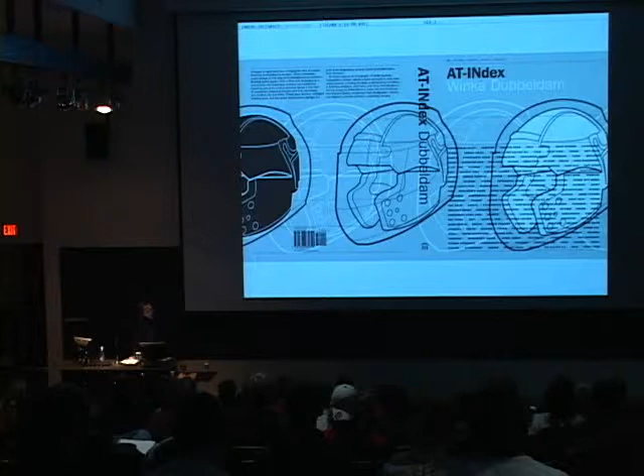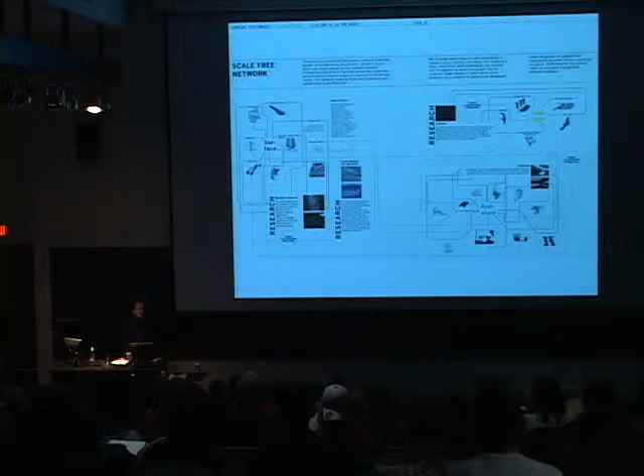So yeah, here we are. The first thing I want to show is what we think about in the office, just to counter that argument. This is a book which came out with Princeton Press in 2006, and the idea is that we as an office believe in networks, not only in the way we work with other people, but also in the way we work in the office. The idea is to have a network of experts in the office, that everyone has their own input, but also that we like to work with other people like MIT Media Lab, or some scientist friends in Holland, since I am originally from Holland. That's the way we like to try and advance the way we think about buildings, and I'd like to talk a little bit about that today.

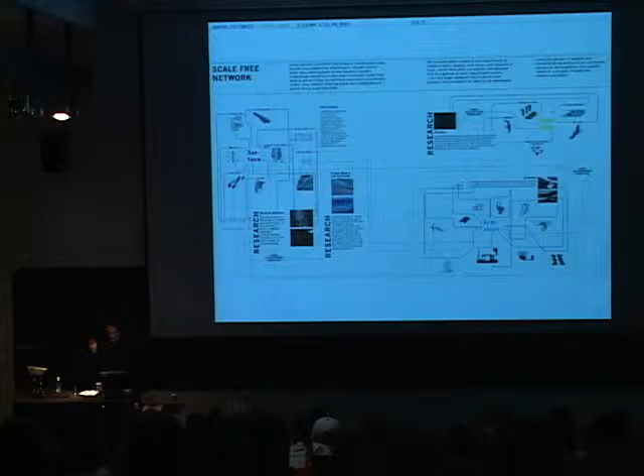The other thing is our research - and this is interesting, the editor of Princeton Press noted to me at some point - that your work goes through fields of research. And as we talked about that, it is actually very true. I think, if you guys ever start an office yourself, you'll hopefully find that as well, that you have focuses which stretch over a longer time than just one project.

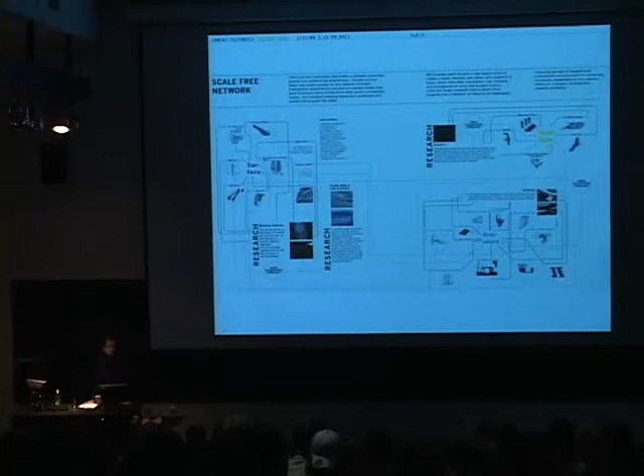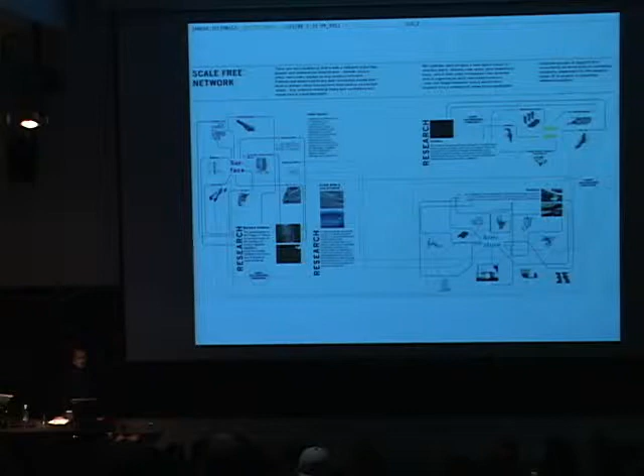So let's say over a few years, our first few years was actually thinking about the theme which was just mentioned, confluence. The first few years we were really interested in how architecture is inflected by urban systems and vice versa, which we called interface. We did a lot of urban studies, but also a lot of buildings which were inflected or influenced by cities and city systems. I think the interesting thing about a city is that it is a set of systems.

And then the next thing we looked at was intelligent surfaces, or what we called smart skins - the idea that a surface is no longer 2-dimensional, but maybe 2.5 or 3-dimensional, that you can occupy it, that it can have intelligence, embedded technologies, and all kinds of performances. And then the last thing, which sounds a bit more abstract, is armature - the kind of 4-dimensional version of a smart skin, so maybe a smart object.

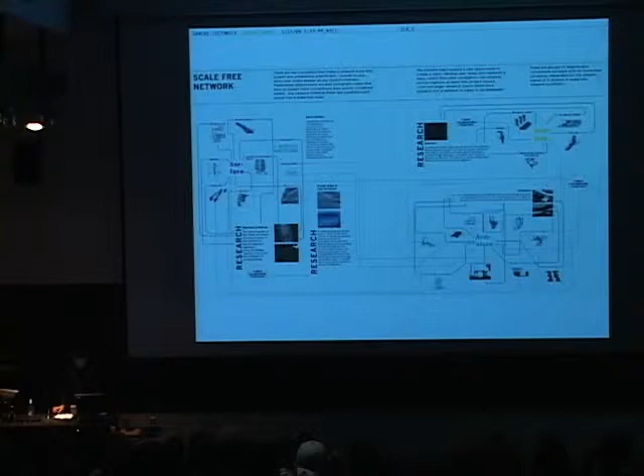Okay. I have one big influence, I think - it's always interesting to think about those things - or maybe two. One is Gilles Deleuze, who has written a lot, and you could say he's a projective philosopher. The idea of philosophy is usually you go back in history, discuss ideas which were before, and then discuss the old ideas again in a new way. He was one of the first philosophers who counteracted that with another idea - that you can actually pose an idea in the future and then philosophize towards it. One of the things he wrote was this statement, which I really like.

The first real challenge lies in the statement and creation of problems, the right problem, not just a problem. The second challenge lies in the discovery of genuine differences in kind, and the third in the apprehension of real time, as in immediate. He wrote this in 1988.

This notion of the right problem, as discussed by Gilles Deleuze, prioritizes concept development over problem solving, curiosity over absolute knowledge, and immediacy over stasis.

This investigative approach has been redlined through the research and design conducted over the last few years at Archi-Tectonics. The work can be described as an open network, a network of projects linked through three fields of research: armature, surface, and interface. These fields are not isolated, but rather create a synthesis of interests that overlap and inform each other, affording a rethinking, reinvestigating, and regenerating of architectural concepts.

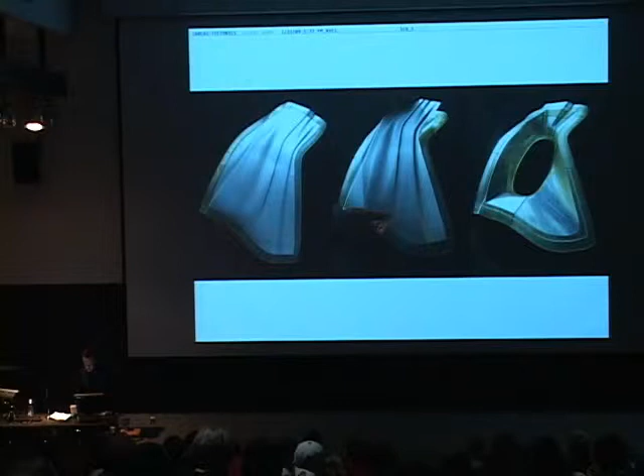This was a light we designed for a lighting design company, obviously. I'm not going to talk too much about it, it's about surface. This is one of the first buildings we built.

That's also why I decided the idea of the book was to actually do only a book after we built some buildings, so we waited a while. But this building was interesting in the sense that what you see here was an existing warehouse of 6 stories, and rather than tearing the warehouse down, we decided to keep it and fold a 12-story building around it.

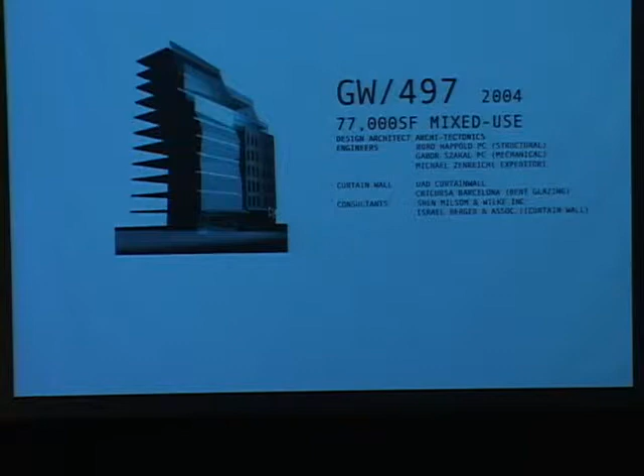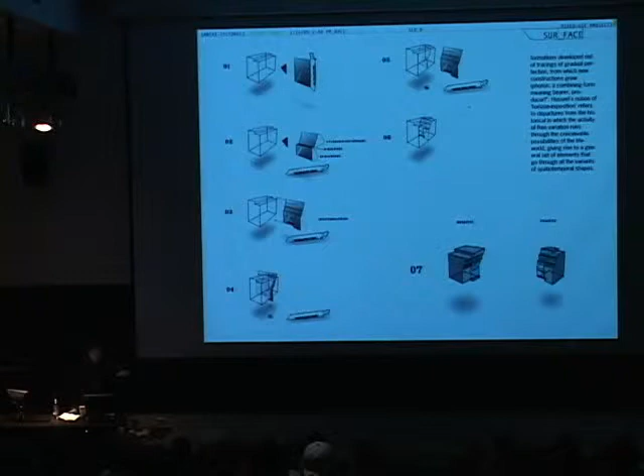And to think of the building code as an idea of recoding - not so much a building code as a restriction or something you have to fight, which is going to make everything impossible, but to think of it as something really interesting. If you read it really well, you potentially could get things back out of it. So consider it a game.

But the first thing we discovered from the building code is that these setback codes in New York are actually not based on a setback code as in steps or the wedding cake scenario, but as you see in this little tiny diagram, it was an inclined plane.

In the end, what we did was use mathematics, the idea of inflection, and inflect this inclined plane on the straight plane and vice versa, which gave us a rippled facade that would go equally from the top to the bottom.

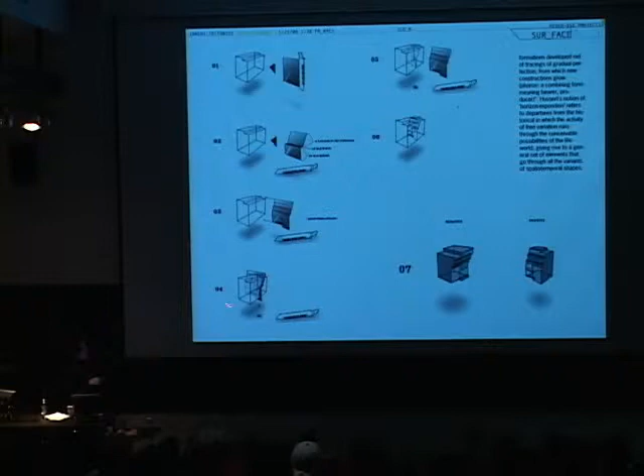It would intersect with the extruded volume of the existing building. So you see this little cutting device here, and then you end up with a building. That's where we are then.

And then the other idea was to create these folds, as you see here, really as folds. So after a long investigating moment, we had the glass folded in Barcelona, the mullions extruded in Hong Kong, and the whole thing was put together in Brooklyn. And then, of course, you have these very brave people who hang out of windows and put these huge things in place.

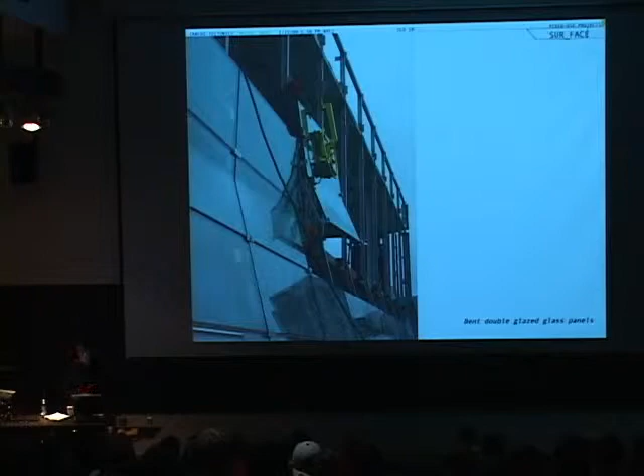The way we did that, and it's maybe interesting since you all work in 3D software, is that we designed everything in 3D. There's no measurements on these drawings in the sense of this is this long and this high, but it's all work points - basically X, Y, Z coordinates in space. Those 3D drawings were sent to Barcelona and Hong Kong.

And those people actually made a 2D drawing from it. So it's quite an interesting way of working. And also what's maybe interesting is you cut out the contractor - nothing to do with the contractor, it goes straight to the manufacturer.

And then the bottom of the building - I should probably go back one. The idea was also that this facade is this famous 3 dimensions. So what it does, every time it hits a boundary, like here on the street, it folds out and comes back as a big glass wing.

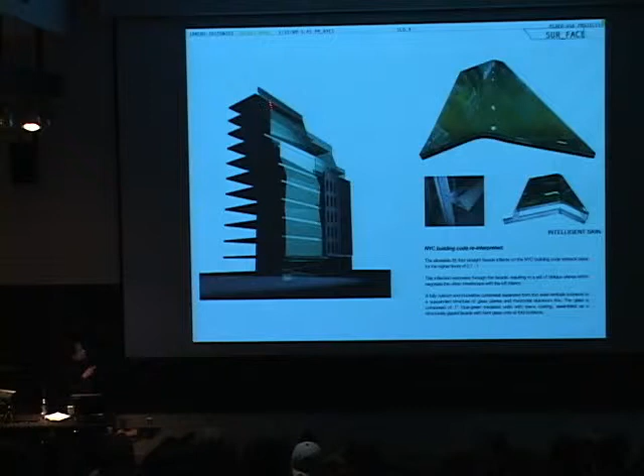Where it meets the building, there's balconies inserted and the glass folds in. And on the top, it folds up and over as it sort of dissolves in the sky, you could say, as a glass building.

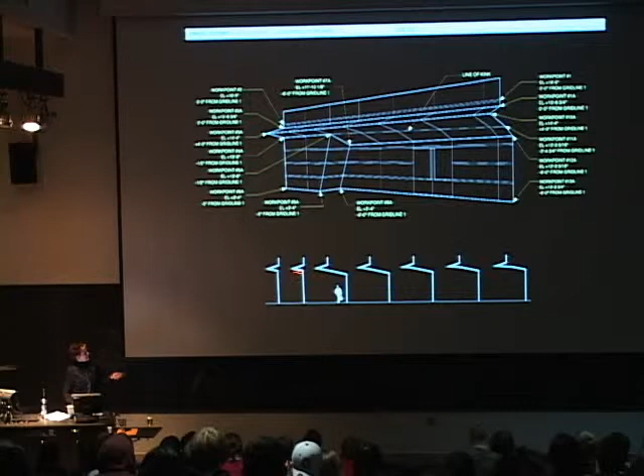Then the sections of the entry wing constantly change. These are the extruded mullions, and as you can see, all these mullions have different angles—only five, thank God. And that's the wing as it started to occur.

The other thing we did is completely separate the vertical and horizontal mullions. The verticals we did in steel, which helps because you can weld it, and that was attached to the building. So the glass is actually floating off of these steel mullions, hanging down from the 8th floor to the ground floor. On this level, there's really just roller connections, so it's kind of flopping around.

This is a gallery in the building, and the rest is residential—Surface Magazine was actually in there. These are all the residences. We made the facade openable. The building is built mostly with passive solar energy and a lot of renewable materials. It's not completely off the grid, but it's very, very low use in energy.

Here you start to see the folds as they negotiate. What was quite interesting about the folds—I didn't know this until we actually built it—is that you can literally look down through the glass of your bent facade into the neighbor's living room, which is quite funny. It's kind of a voyeuristic building.

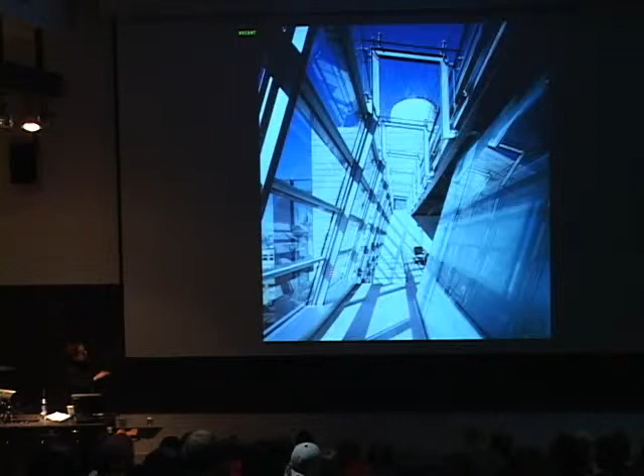And then this is the top, where the penthouse comes up, over, and down, forming a glass parapet. Here you can see that the steel really carries all the glass—there's no structure in the facade. All the actual structure of the building is held back, so the concrete is all cantilevering up to here. The steel is really just supporting the glass itself.

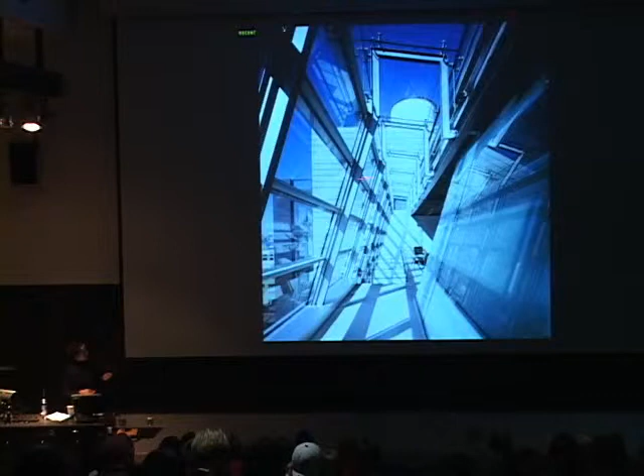This is then on the top. You can see that the glass is just connected with little pins, like the wing on the ground floor was as well.

This is then an interior. We mostly delivered this building as raw space, which wasn't that raw—it had finished surfaces, but in New York you can imagine. We did this loft, about 3,500 square feet, for one person, a 28-year-old guy. And then we did a loft on the 2nd floor, about 1,600 square feet, for a family with one child. In New York it's very hard to predict who's going to need what, so we finished the spaces as surfaces but didn't put in bedrooms.

This space we did for a person who was a painter and photographer. We made it basically very simple—just one spine connecting the east to the west facade, and behind that are private spaces. For example, this is the bedroom with a bathroom there.

The wood is quite interesting—it's bogwood, an oak that's been in the swamps, which gives it that beautiful blonde and black pattern. It's kind of a tree gone wrong, you could say.

This is another building we just finished. It's a completely different market, in Philadelphia. Philadelphia is much more alternative than New York—different market, different people. It was built in Northern Liberties, one of those industrial areas where artists start to live, galleries start, new restaurants start. It's really great, kind of an alternative area.

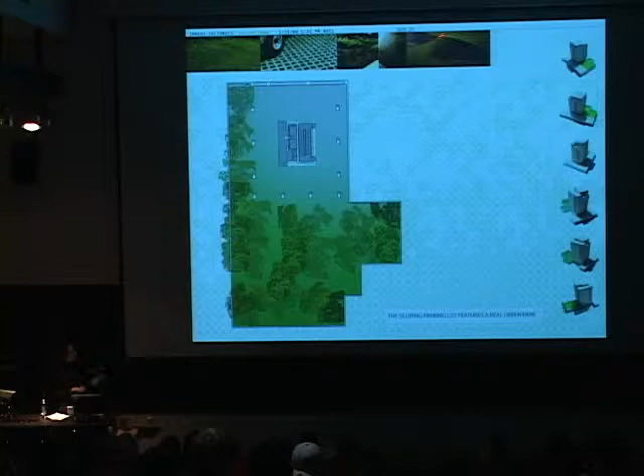We thought it was important that it became a park, so the surface where you're parking on is grasscrete, which can go from this pattern all the way to grass looking—you can vary from here to here in the pattern. And the way we did that is we actually only had the building standing on the ground on one side.

So this is the only level where it's kind of zero. Then it folds up to +1, and the parking lot goes from 0 to -1. So there's a slip between the two, which gives this very spacious area.

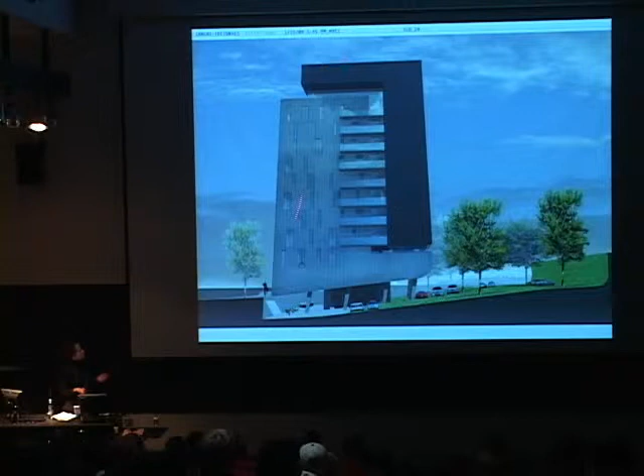The area it was built in is very small scale, so we decided to build the building from a set of interlocking Ls, so that it started to fit more into the surrounding area and the whole region.

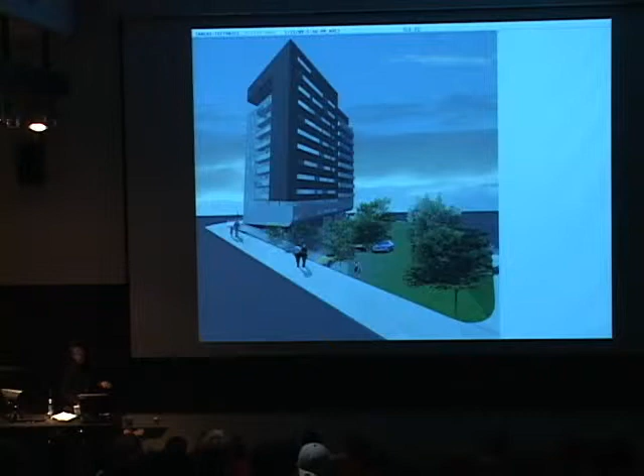It's on the corner, as you can see here. A lot of people were already calling this a skate ramp. This had a perfect curve. And the other curve is found where the building meets the parking, right there where you go under the building.

It's built in concrete, like in this school. I was just noticing today all the beautiful cantilevers you have. Well, that's nice, because when you pour concrete, you get these huge cantilevers.

This is up on top of the penthouse. You get interesting cuts of the city. This is actually the city center of Philadelphia as you look out over it. And then this is the front, where the building hits the ground.

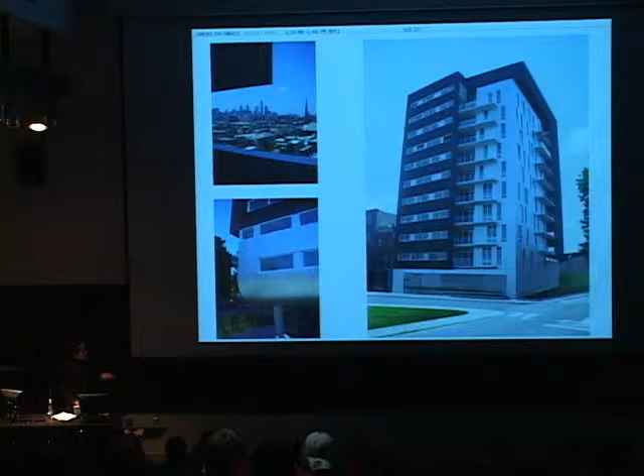This is the facade looking down. The whole building is built in alucobond — an insulated aluminum panel. That's why you can actually bend it, and it's very flexible, because it has two skins with extruded foam in between. We used the size of the panel to make exactly the line of the windows too, so it feels like a modular system.

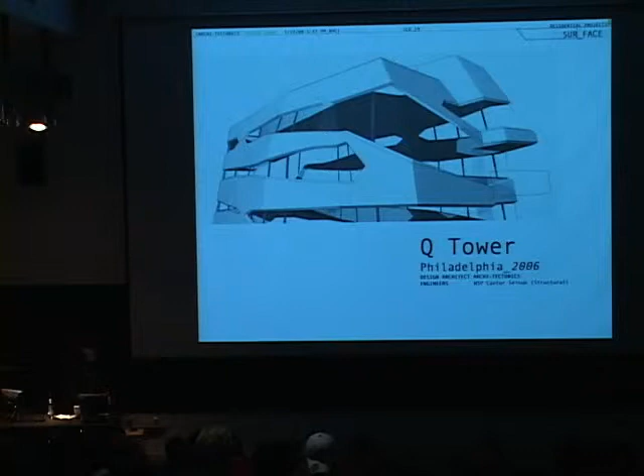Then, the same owner, next tower, is called the Q Tower. This is a tower where we worked together with MIT Media Lab. I was really interested in making a tower that would become more robotic — we talk a lot about interactive spaces, but I was interested in turning that interactivity into something more like what your computer starts to do.

It's basically like software — it starts to learn your behavior rather than the other way around. What we looked at with Ted Selker from the MIT Media Lab is how you take known technologies — smart passes for parking, sensors for lighting, sensors that sense the sun and put blinds down — and link all these technologies into a system that would ultimately get more advanced.

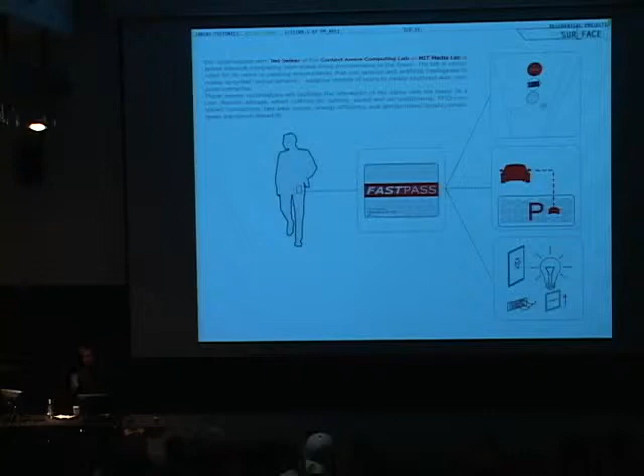So here we're running through some of those.

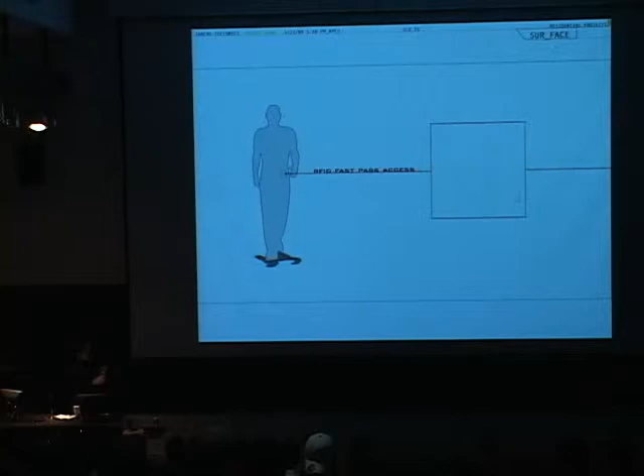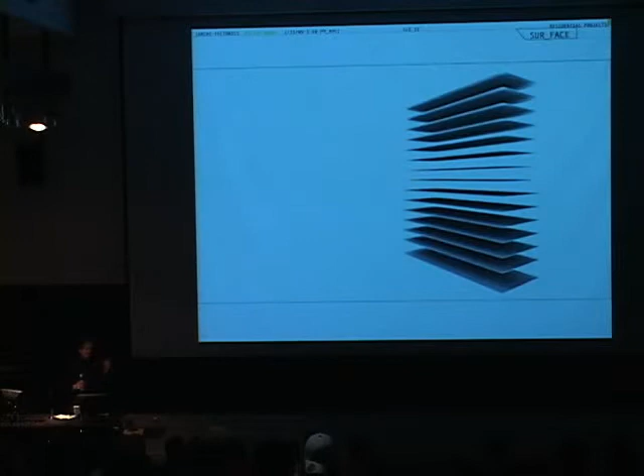For the tower, what we'd discovered in the meantime when we built the American loft was that while we were pouring the concrete, all those facade elements were being made at the same time. So when we finished pouring concrete for the building, three weeks later the facade was up. We thought that was quite an interesting idea.

The next thought was: if you build a tower, why couldn't everyone have a different house — like building villas in a tower? Is repetition really that important if you have parametric software that lets everyone have their own individual apartment?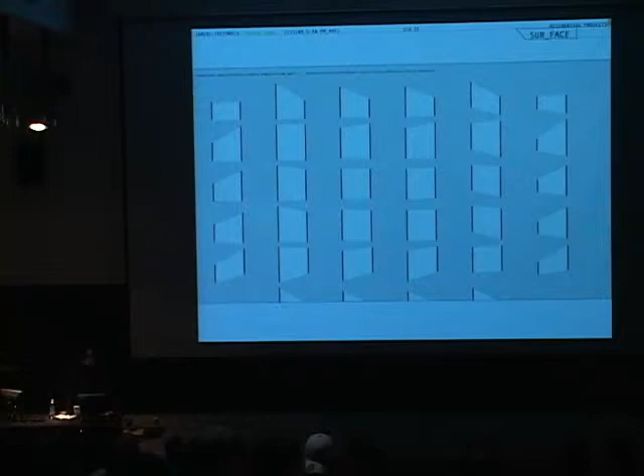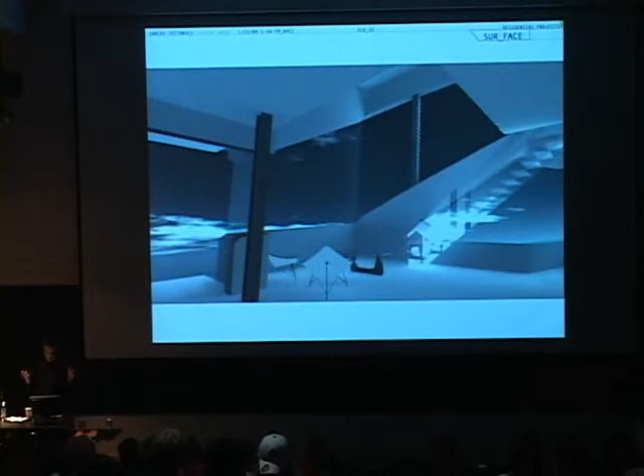So what we did was devise a simple set of algorithms — simple rule-based systems that defined a freedom where you could rate each opening in the building relative to its function, give it deviations and restrictions, and let them negotiate with each other. What happened is it became possible to create different windows for different spaces, but the main premise was that every space, including bathrooms and kitchens, would have windows.

The other thing — probably my Dutch background — is I always think it's weird that you only have penthouses on top. I personally don't like being on top; I like the second floor. So what if I ever got money? I'd have to live in a small apartment, because every tower is built with small apartments on the second floor that get bigger toward the top.

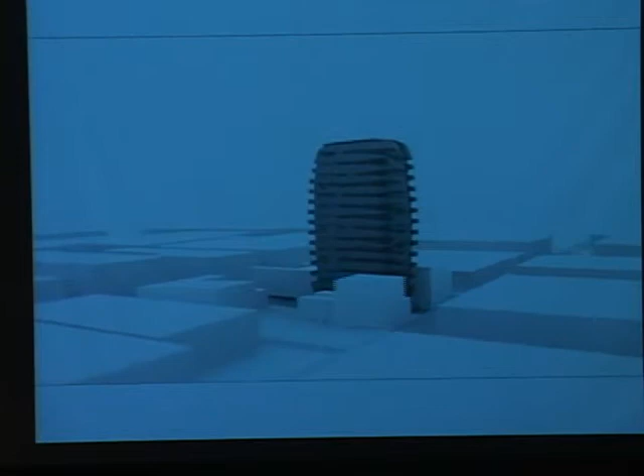So I convinced the owner to do 5 penthouses — 2 on top and 3 distributed through the building — so that if you wanted a nice big duplex on the 5th floor or the 8th floor, it would be possible.

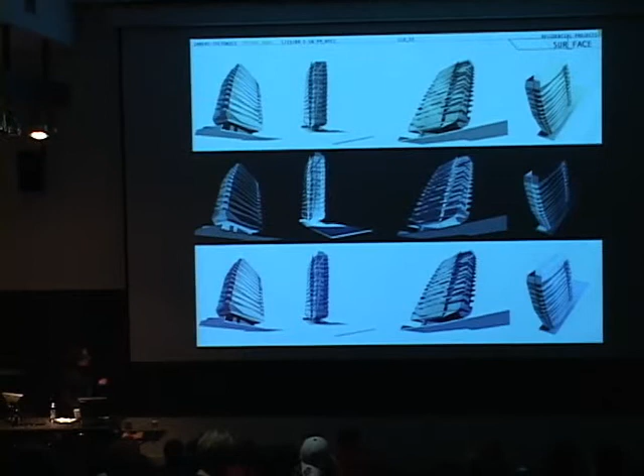So this kind of worked itself into this little tower. It's a very, very small site—literally the site of a plot in a normal urban environment. I think it's about 25 by 100 feet.

This is the parametric software we started to put it into, the limited version of CATIA. Frank Gehry's office developed the digital project—you probably use it here. And that allowed us to make the quite random design we made in the beginning.

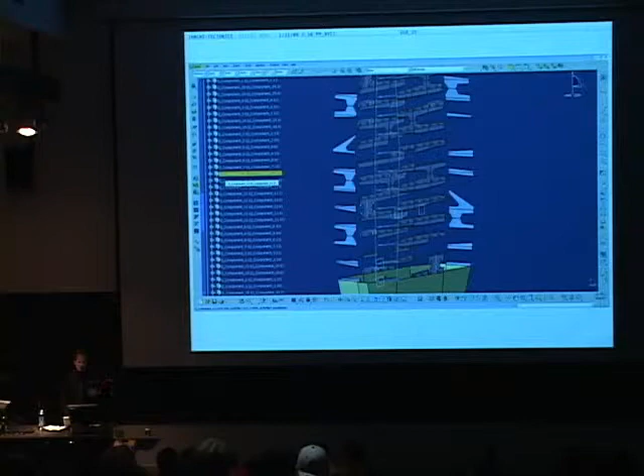We started to see similarities, and we found families of components which could then be repeated and basically sometimes mirrored. Through that, you could have a complete random system, but still not have 6,000 different molds to make.

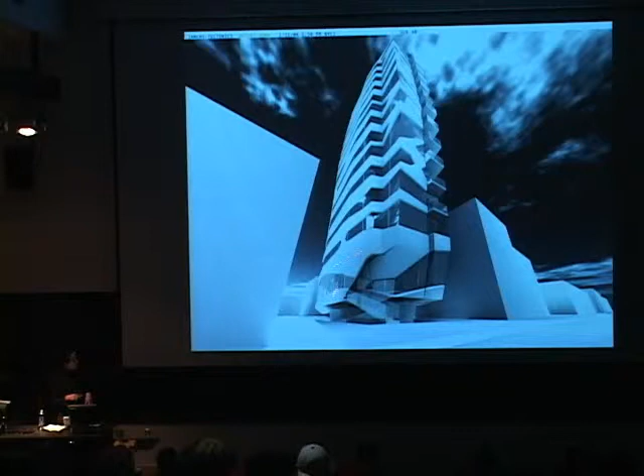So these are just some technical things. On the ground floor, we had a restaurant. What we did is go half a floor up, so that if you go half a floor up, you're in the restaurant, and the parking behind—the inhabitants have their own entrance from the other side. I think I don't see it here, but this is basically the restaurant.

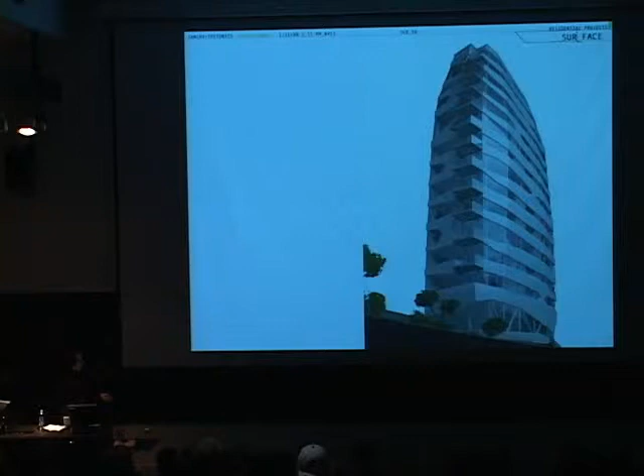This model, we have our models made in Singapore. They have great inhabitants, I'll show you them—like here, these people. They also only have sports cars. It's really great.

And we have Superman also living here. It's quite cute. They're also glued really strongly, so we couldn't get them out, so we decided to just give it to the owner. I think they're still in—no one really noticed, but they're very polished looking.

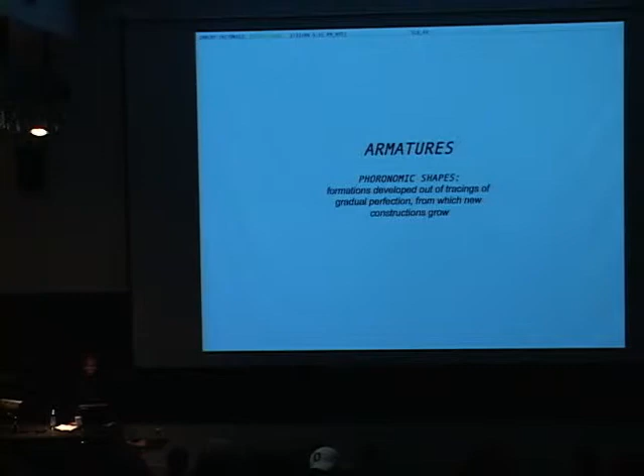So then we got interested in armatures. The person I just mentioned, Edmund Husserl—you might not know him—he's a philosopher in mathematics, 1937. He wrote a little book called The Origin of Geometry, and he wrote something on phoronomic shapes.

Phoronomic shapes, to me, are very interesting because they are not only three-dimensional, more biologically formed organic spaces, but he sees them as spaces which potentially have the capacity to create other spaces. To me, this is what you see here—from which new constructions grow. So the idea is that you make something which ultimately can generate something else.

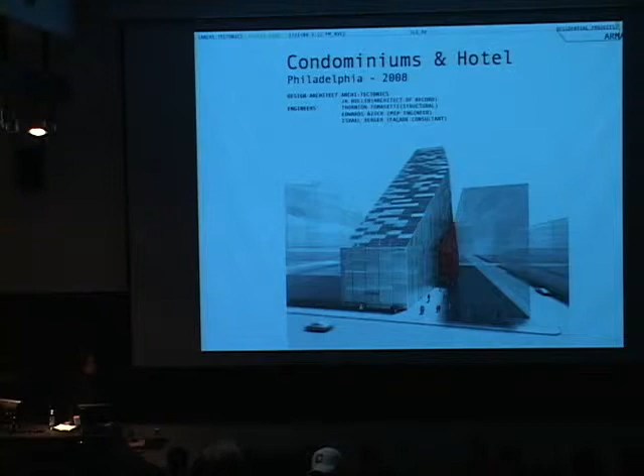We're very interested in—and actually forgot to put one house in there, which is a more intense example of this, but if you buy the book, you can find that. I'll show a bigger example here where we started to think of the whole interior of, in this case, the hotel as a really intense knotted space.

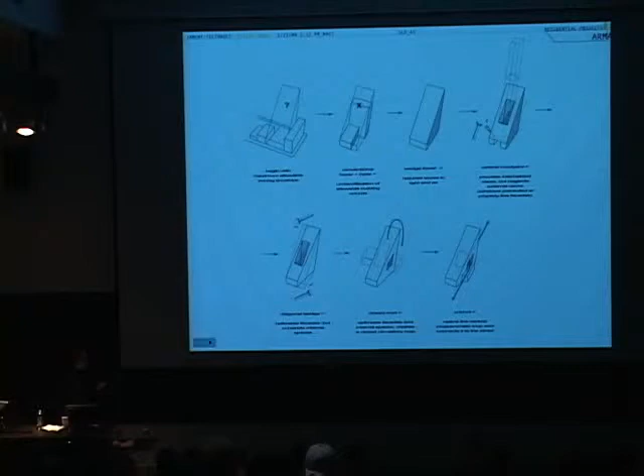This is again the building code kind of decoded. And the bottom result you see here shows how the whole space is, in a way, one huge intertwining knot, which allowed the condominiums on top and the hotel functions both to use the more general functions actually located in the knotted part, which you can see here.

So the idea of this kind of armature is that there's a really intense intertwined space. The knot and the unknot is another mathematical principle, right—it's the fact that you can knot things, but we don't have two ends, we always loop back to each other.

And then here the tower—one second—has the entrance on one side. We should have turned it around on the other one, but on the other end you get another part coming out, which is the pool, and then around the interior courtyard you get all these public functions focused around this crystalline space.

The rooms are basically all divided through the two arms, and the apartments are here on top. The pixelation you see here is literally a registration of the proximity to the lot line—a very simple rule: if you're right on the lot line, you can have 10% glass, and as you move away, you can have more.

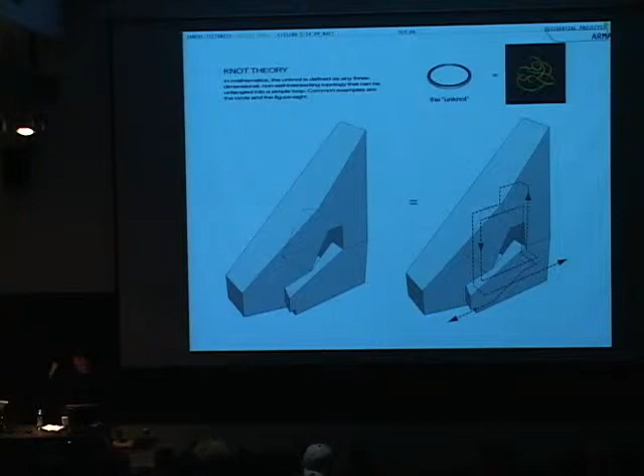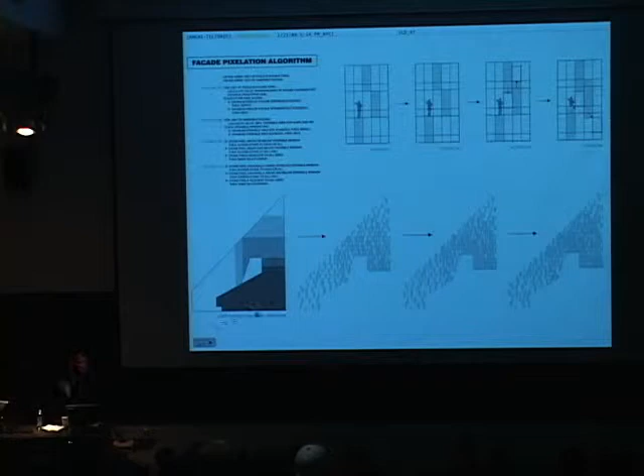Because we had this kind of diagonal shape, which constantly moves away from the lot line and then loops back, it's quite nice that the facades picked up that pattern as you register the proximity. That's why there's this graduation or gradation of the pixelation. The pixelation is stone and glass, so basically it's a stone and glass tower.

And of course, because of that big opening in the middle, sometimes you have two different towers, and then they connect back to one.

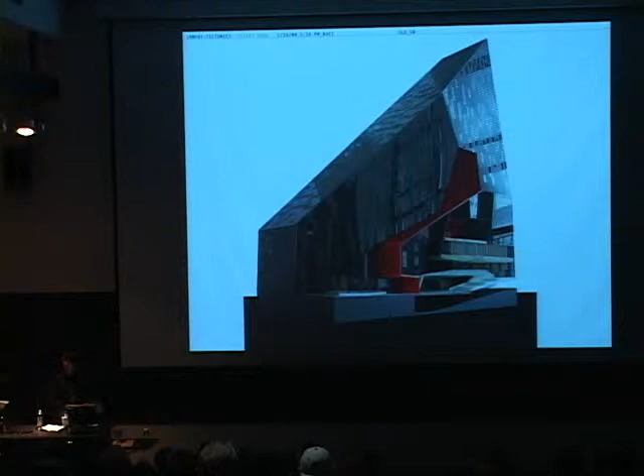And here you see the big public space. The idea is that if you come in through this arm, you get a 5-story lobby. The ground floor lobby is connected to meeting rooms through a big ramp, which is also the ramp of the parking garage below. The spa is suspended here, and this is a 2-story restaurant which has a terrace on the inside of the building. Let's see the other side.

And this is that kind of armature in the middle, which starts to connect all the different spaces inside and connects to different floors.

You see that here again. And this is actually the restaurant here. This is then the terrace. So here, the terrace, you start to be kind of inside of that glass area.

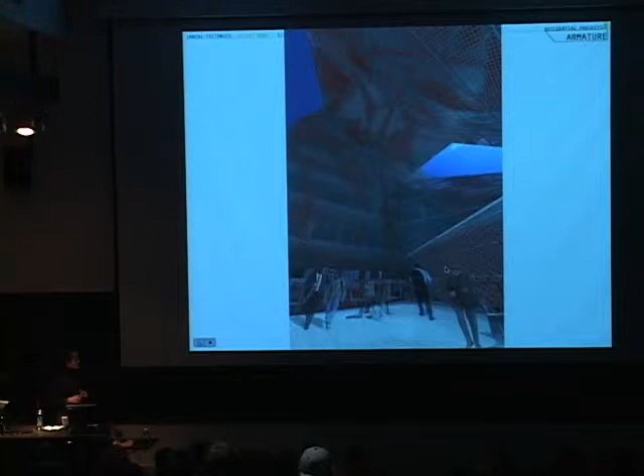The decoration of the whole loop, we gave a pattern of kind of a large forest. The interesting thing is you only see the forest if you zoom out. So if you're actually in your room, you see only a few dots. But if you look down on the roof of the pool, you'd see more of a pattern. Because we chose the pixels very, very large, so that there's no real pattern, it's more of a dot system.

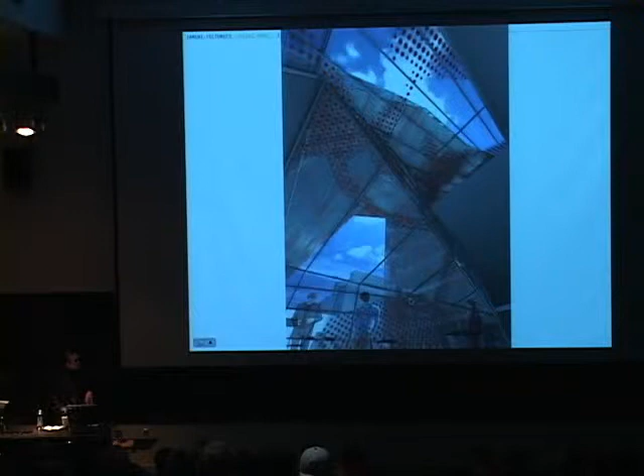This is in the restaurant looking up. And then this is back to the entrance of the hotel.

This hotel is a 5-star hotel. It's for the GHM group. Probably the most well-known parts of that hotel are the Setai in Miami, the Chedi in Milan, or the Anamandari in Bali. It's an Asian group. It's quite interesting, very, very high-end.

The interior designer is from Bali, so it's going to be quite an interesting contrast. I wouldn't want to do the interior, to be honest, in this one. But we thought of one here, because we had to solve this, which was quite interesting.

So you make a building with a 45-degree glass facade. And we did that because we basically built the full building envelope, as you understood. So you get interesting areas.

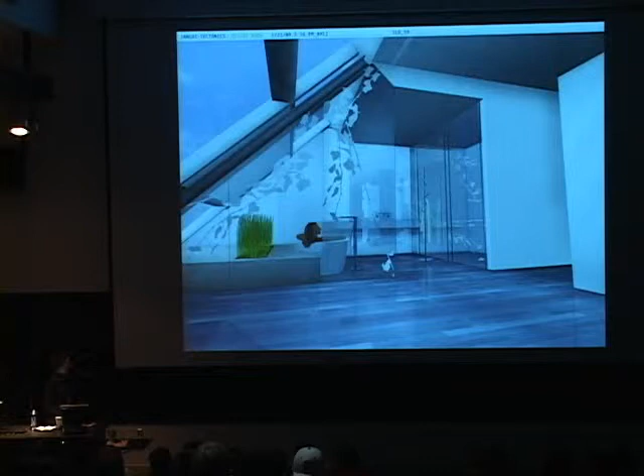And we thought it would be beautiful to have this as a wood deck with plants in it, and then your bath, right? So that if you're sitting in your bath, you can contemplatively study the clouds going by. It's very poetic. And it has automatic blinds going down just in case, it's a bit glary sometimes.

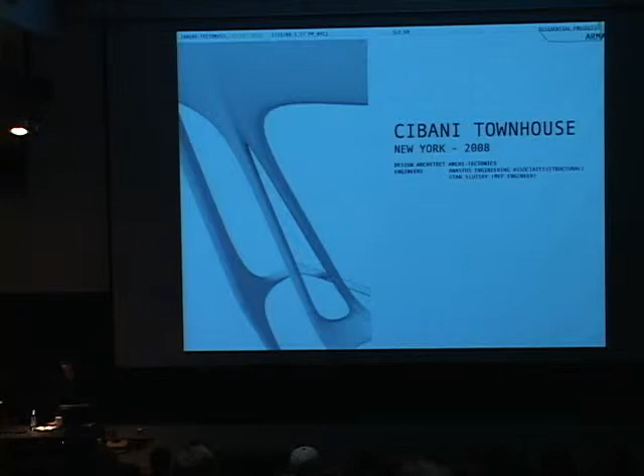Then, while we're working on bigger projects, we also do very small projects. This is a townhouse in New York City, in a landmark area. So the front of the building here is actually a very standard landmark little townhouse, nothing special.

From here, everything was gutted and taken out. And we added 12 feet to the building, as you can see here. So this is basically added to the building, and the back facade is completely new. So it's quite an interesting thing to build a completely new building, but reversed.

You will never see it from the street. Actually, only people in the courtyard will ever see the new building.

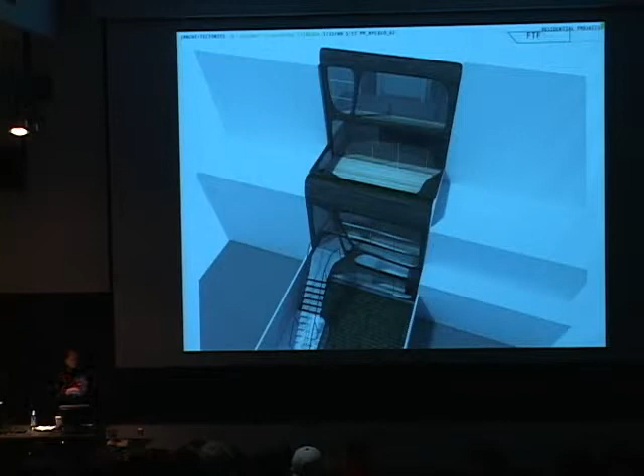The concept was to rethink this facade, a little like we did with the bigger Greenwich building, as a three-dimensional zone where you would be really connected. The husband is a writer, he works here, the living room areas are here, so through these glass floors you would always have contact with each other. Then it folds back as a big terrace here, bedroom and 2 bedrooms up here. So the idea is that the whole building has these intertwined zones fluctuating around the facade, rather than the facade being a separative membrane.

Here you see the studies of kind of very spinal elements. It was quite funny, I had to go through landmarks. Imagine landmarks in New York is kind of a whole group of serious historians and preservationists, and here I come with these kinds of things. It's kind of an interesting battle.

So we hired a historian because we thought we had to become historical on this thing. And he called it a Victorian tea porch. So I actually had to look up what a tea porch really was. I'm from Holland, we don't have teas and porches and things like that, we just go ice skating or sailing.

So yeah, I got very well versed in the whole story. We explained it and they loved it, which was really thanks to him, because I don't know how I would have explained this otherwise, except for the fact that I'm really interested in 3D spaces.

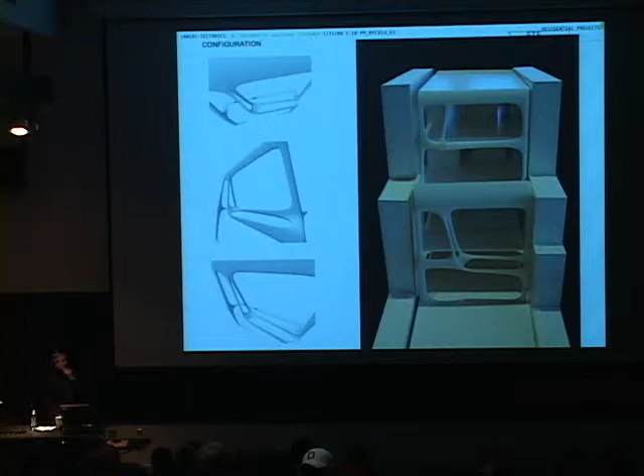And the other thing which is fascinating is that this thing is made with this machine up here. The other people we work with a lot, apart from MIT Media Lab, is a car design company in California, and they have this huge CNC router thing where they can basically cut a whole car out of foam.

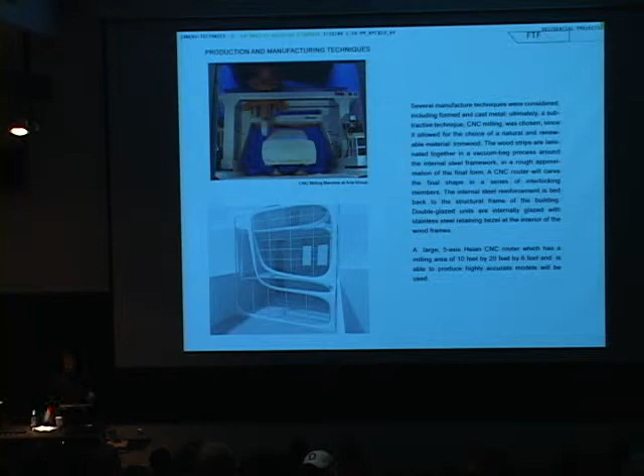When I taught at Harvard last semester, I asked him to come talk to the students, since we were thinking about building components. He wanted to see my office to explain this facade to him. I said I wasn't quite sure how I was going to make this, except maybe send it to Bali. He said, are you kidding? I can stick this in my machine because it's less than 20 feet wide.

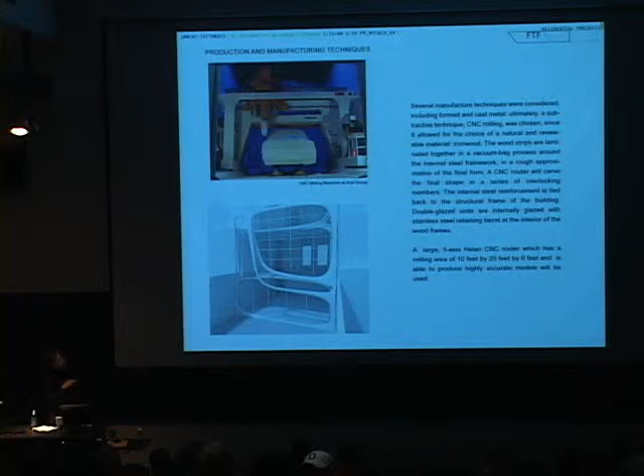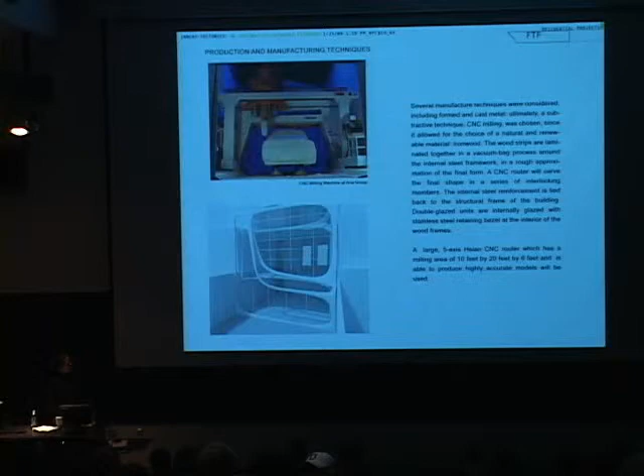So this is going to be made in 3 pieces. He can make this whole bit in one jump, this whole bit in another jump, linked over these lines here, and then the top in another jump. It's quite interesting, and it's made out of recycled wood from old boats, which we get from Bali. So in the end, something did come out of Bali.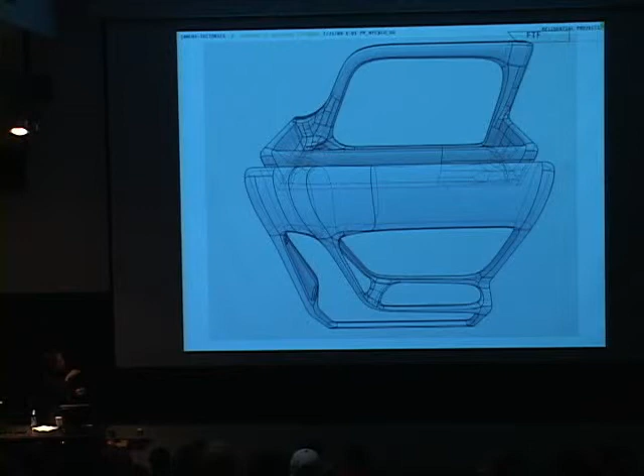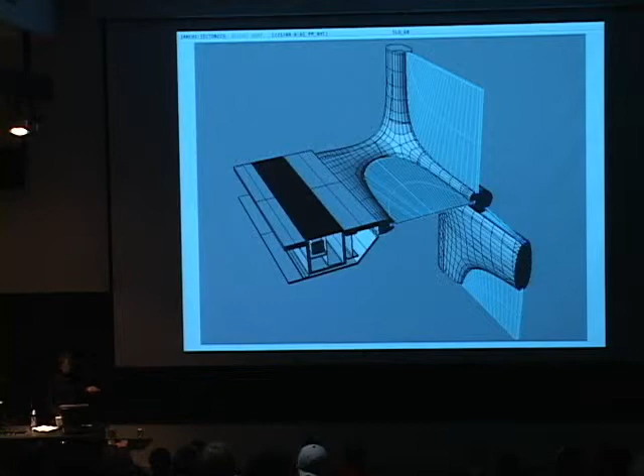And then, how to sit in the glass. I didn't want to have an aluminum facade in a wood facade, so we're really considering the wood as a big huge window where we put the glass straight in, which is safer, because if you had more materials it would be tricky with expansion and other things. Here you have some more details.

We like the detail, obviously. We really do sit there endlessly figuring it all out. So here you have the area looking down through these glassy areas, and you stare down.

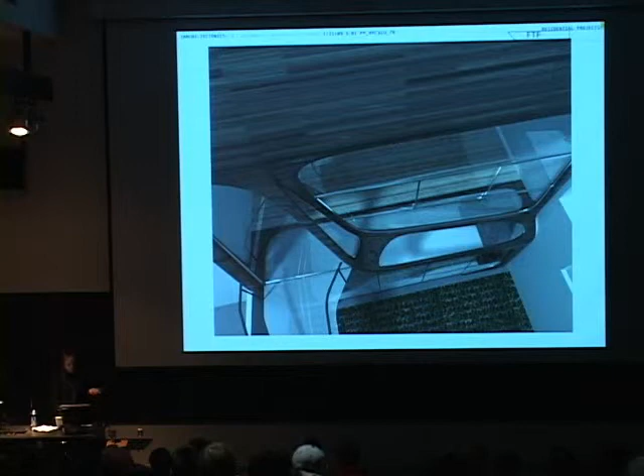The other really interesting thing is how you actually make this wood, because obviously you can't have these huge chunks of wood. So you can choose whether you want to laminate the wood beams this way, or whether you show the flame. It's a really interesting study, because we did some different ones where you either get a stripy pattern or you get all the variations. Huge difference, big decisions — the big decisions in the small details.

Here's the facade if you look up, and you can see the neighbors. It's quite something — I always wonder, we have all this struggle to go through landmarks, and then they have this next door. I actually said that in the landmark meeting, when I got really irritated. They're not very sensitive to those kinds of details, or remarks for that matter.

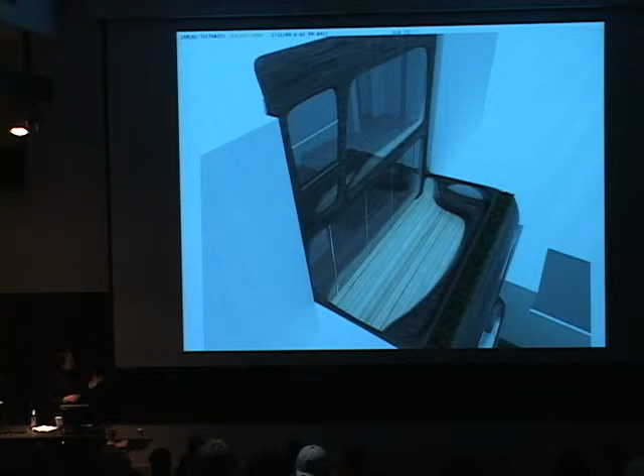So here you get the seating and the plants. It's quite nice because it feels very open. We have the wood running into the space also, so you have this continuity of in and outside. It's a very protected back garden, so potentially you could have these facades open all summer.

And then this is a huge project we're working on in Brussels — a very interesting question. A client found a tunnel, a traffic car tunnel, which is under half of Avenue Louise, a big huge shopping boulevard in Brussels, and the tunnel only covers half the boulevard. So this is a quite interesting, clever idea: he proposed to the city to elongate the tunnel and pay for it, and in exchange build on top of the tunnel. So now he has free construction ground, and the city gets a tunnel — everyone's kind of happy with that.

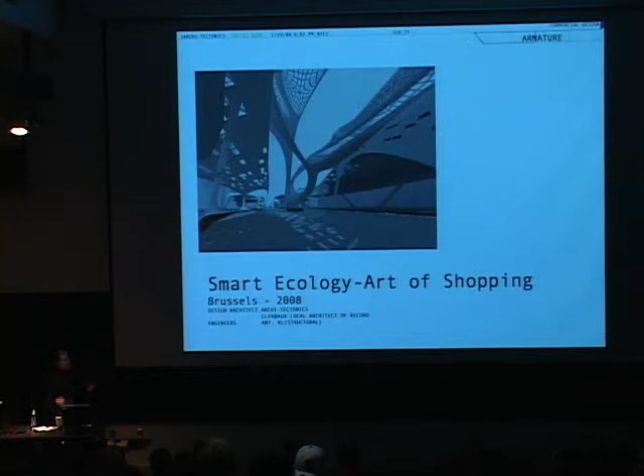And then they asked us to make 10 pavilions in a park on the tunnel. Not that easy — it's interesting because you can't make foundations, as you can imagine, and you can't put any load on the tunnel, which is another problem.

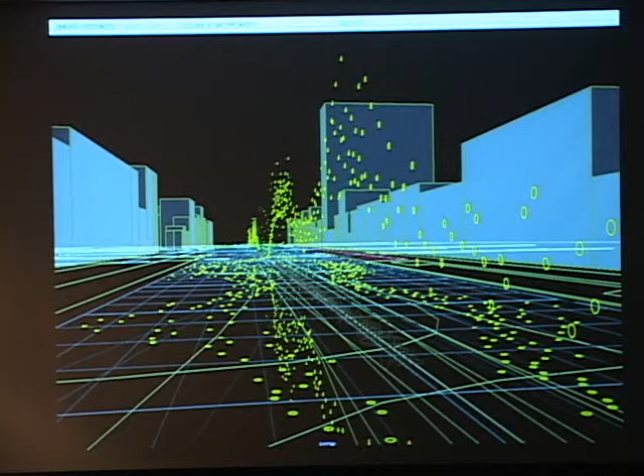But what we thought was really important is to make the inside spaces as important as the outside spaces — not to design buildings with interiors, but to consider the interior of the pavilion, the interior of the park, all as interior. So what we did is we took a little sound piece, took the frequencies — this is also nice about Maya — and inflected these frequencies onto shapes where these started to occur. There's a lot of work in between, but I don't want to bore you with all the details. What happened is, the idea is really that these exterior spaces, the green spaces, are as designed as the interior spaces.

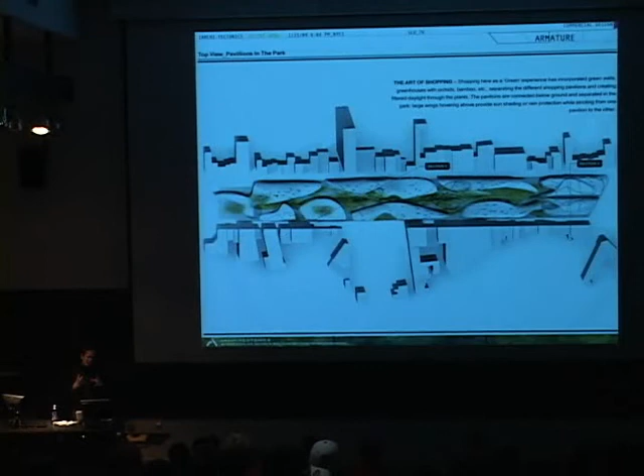The other thing we thought about when starting this project is that when you listen to a developer, there is very little green space. So we made greenhouses inside of the pavilions, because I thought it would be beautiful if one shop was separated from another, or a gallery, through a greenhouse full of orchids or bamboo or something like that.

At the same time, we made the roofs collect water, with retaining tanks, kind of an automatic irrigation system. So both the park and the greenhouses are irrigated automatically. We made a whole path for gardeners, so they can garden the outside spaces, the inside greenhouse spaces, and keep walking through the park.

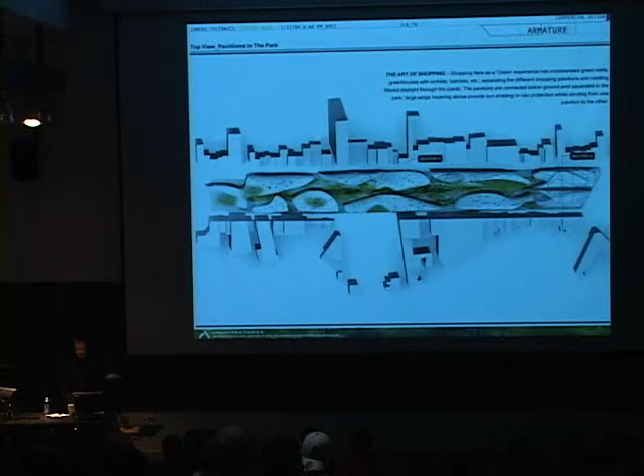So this was the proposal. It's pretty low, sometimes 1.5 stories, sometimes 2 stories, and a story below ground. We thought of all kinds of ways of making green without needing ground, so we have suspended green, self-sustaining green, all kinds of green.

Here you start to see a little bit of it. These are actually big huge mesh shapes which have hanging green. You'll see that in a second. And then these interior spaces have basically always these kind of fluid connections. The greenhouses connect obliquely through these volumes, so the gardener actually has more shortcuts than the normal pedestrian.

And here you see a little bit of a section. There's car traffic, and there's also a subway to make things more complex. We're kind of half underground. We made these all double height so that when you're in the park, you can look down and have light. And here you see one of those gaps with the greenhouses.

The way we developed the whole skin was with an engineer from Holland, who is the first person who developed free-span concrete shells, a very old man. So the whole idea is that there is no structure in the skins at all. It's basically free-span, with lots of little perforations so daylight comes into the spaces. These systems stand almost like tables, or like freestanding structures within the big shells.

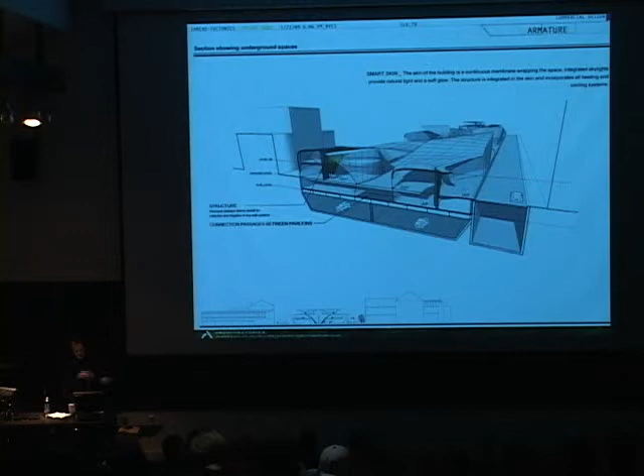So it's kind of a complete other way of thinking, because as you can imagine, this was not that easy to build. Plus the sewers, or whatever is in the ground - lots of things in the ground.

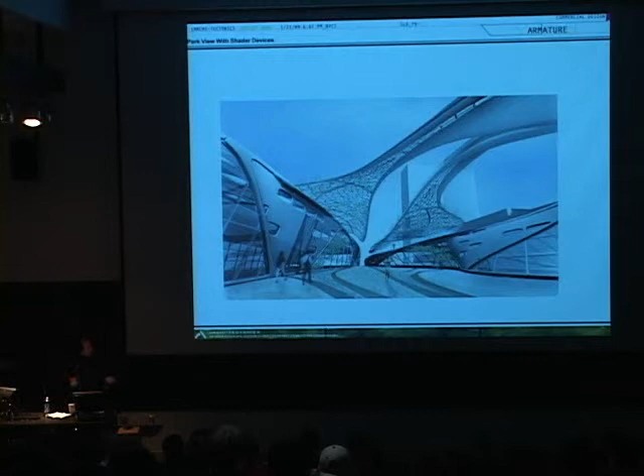Here we have the suspended gardens. The idea is really to create that as a really important element. Between this and this suspended garden is actually another cafe. So we use the spaces occasionally here and here also as different cafes or different exhibition spaces.

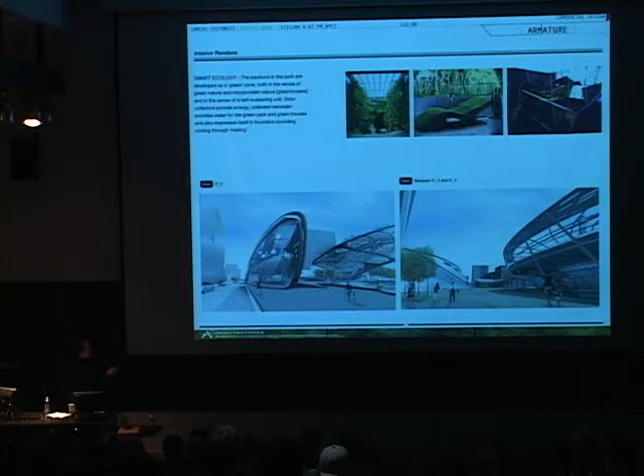And here you see our inspiration for green things - we got carried away with the green thing. Then you start to see how these spaces start to develop. It's quite interesting because these are very, very beautiful old townhouses, where we actually also did a proposal for one of those.

This is the meshy forms. These are actually stairs inside here where you go to the restaurants below. And then they came to us and said, we would like 3 squares, and we would like an ice rink like Rockefeller Center, but bigger. So here we go - this is the ice rink, and it's a third bigger than Rockefeller Center.

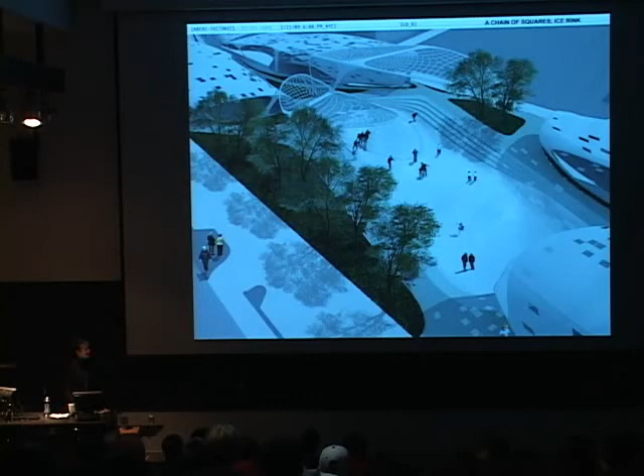In the winter, it is really a nice skating rink, but in the summer, we dry it up, and we use it for projection of movies so people can sit on the steps, or for dance events or other events. Because that much water in a very wet climate is not that easy, actually, funny enough.

And then this is another square where there's a fountain. This fountain reacts to the sound of the traffic - if there's lots of traffic, you have lots of fountain, and if there's no traffic, you have no fountain. You have to be rigorous about things, I think. But that's the idea, and it's also like a perforated skin, so it's like a big whale in the ground, and the water really only comes out in certain patterns and sporadically.

So theoretically, if you don't mind getting wet, you could walk over it and have the fountain around you. It's kind of the idea of being a bit more easygoing about what a fountain is, or what an object is, or how you want to treat these kind of surfaces. That's it. Thank you.